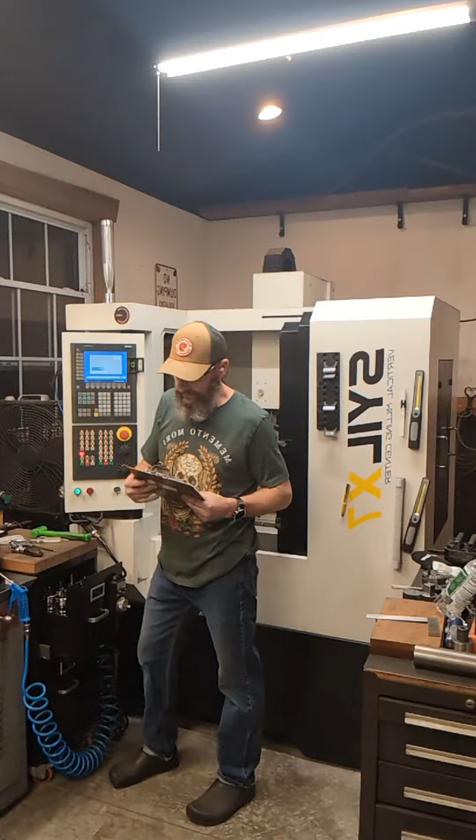Right now what I'm doing is running a warm-up cycle for 20 minutes. I got this program about 5 years ago from Peter Betts. I don't know his website, but he programmed this for Syil. I use the Siemens 808D controller and I love it. It works great.

I'm gonna move you around the shop as I go. How's that? So, these two at 61. Three at 61. I got one there.

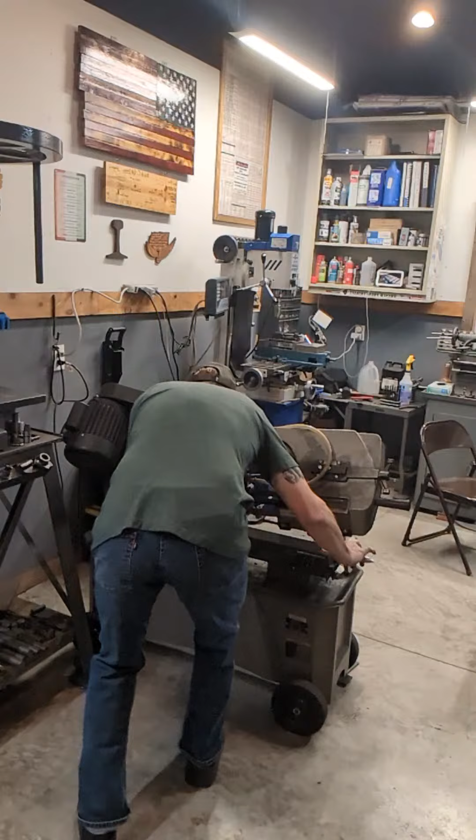Okay, this is my Jet horizontal bandsaw. It's been with me a long time, doing really well. What I'll do, so I've set this stop up at 61 so I don't have to remeasure the rest of them.

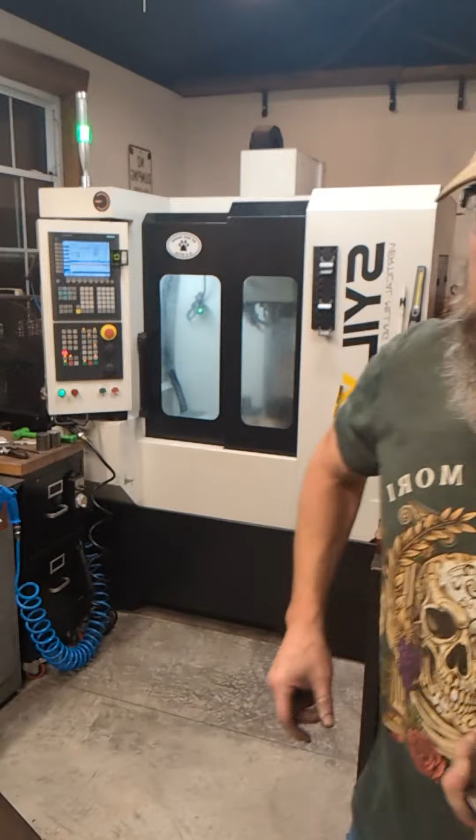So up until this point, I've made... this is what the bottom will look like, it'll be round like that. Okay, that's the 15 mil size, about a big tablespoon. This is an old bearing out of a locomotive, out of a train, and then I just have a little ball that goes into there. I think this was an old bolt that I rounded the top to go in there.

On a bigger setup for my bending die, I actually have a big, like 2.5 inch ball receiver for towing trucks, you know, for trailers.

So this is ready-made, people buy these things for the fly press. There's already a flange. Turn this down so it'll fit in your 1-inch bore. You can use this for forming, making bowls. Probably would work for a large coffee spoon setup.

But you know what, I've got the mill. I'm going to make it special, and then put it on my website for other guys who are similarly interested in precision-made tools for their fly presses.

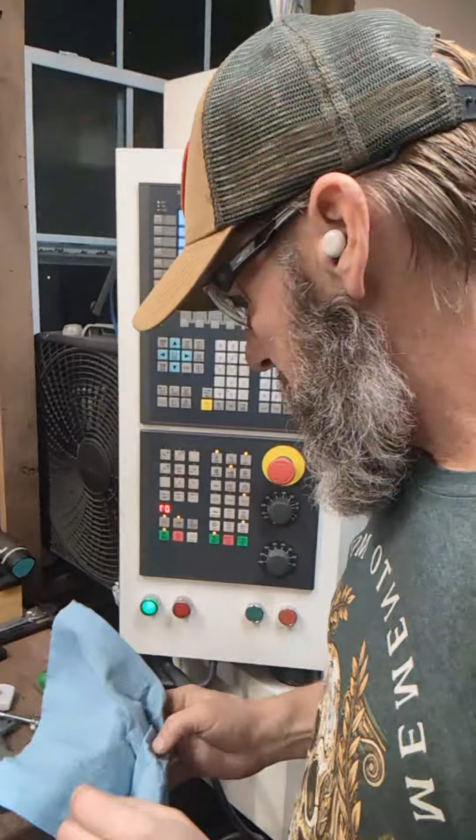You want to see what I see? This is my setup table. I've got my dead blow hammer, making sure my part is seated in the vise when needed.

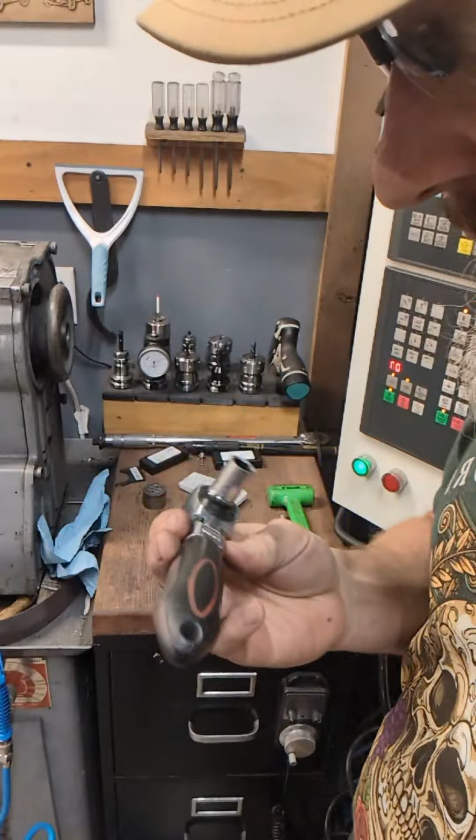I've got some hex wrenches for soft jaws and for tightening my movable jaw in my vise. I use this to tighten the vise. It's got a very short handle, which flips out like that, so it could be a speed handle if I wanted to. What I like about the short handle is it keeps me from over tightening the vise.

It's got an old coin die that says 0 fucks given. I make a lot of those. This one's worn out, and I just use it as a paperweight now. Got my 2 torque wrenches.

One for torquing my self-centering vise from Silver CNC, and one for torquing the Silver CNC 0-point base plate. So I have one set at each required torque value. I keep this handy in case I'm putting on or off soft jaws. It speeds up the process because this M-lock vise is quite long, it's got a big lead screw.

And then I've got a 12-station tool set up here. I just 3D printed these inserts, put them on some plywood that I had in the shop, in the wood shop next door. So these are the tools that I'll be using. The 1/4 inch, I've got a 1/4 inch end mill.

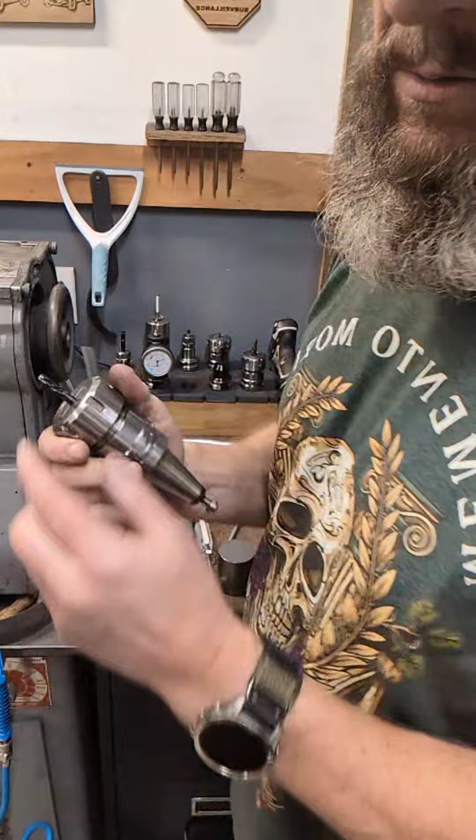That's in the mill, we'll use that too. I've got a couple ups. I need to be able to clear 22 millimeters on a couple of tool paths. So I want to make sure that my quarter inch, my 3/8 inch rougher, and my quarter inch ball mill have enough clearance, enough tool length. I normally suck these tools down as far as I can for rigidity and surface finish. Like this right now is 27 millimeters stick out, so that'll be fine. So yeah, I'll go through and make sure they all work.

22 millimeter clear, yeah. And then you can see here, when I drew this, I just wanted to know from this flange to the top of this ball, how much tool stick out do I need so I don't collide with anything.

I need to replace this roughing end mill. Looks like it's worn out. Yeah, it started to chip in certain places, so I'll put a new one in here. Let's do that.

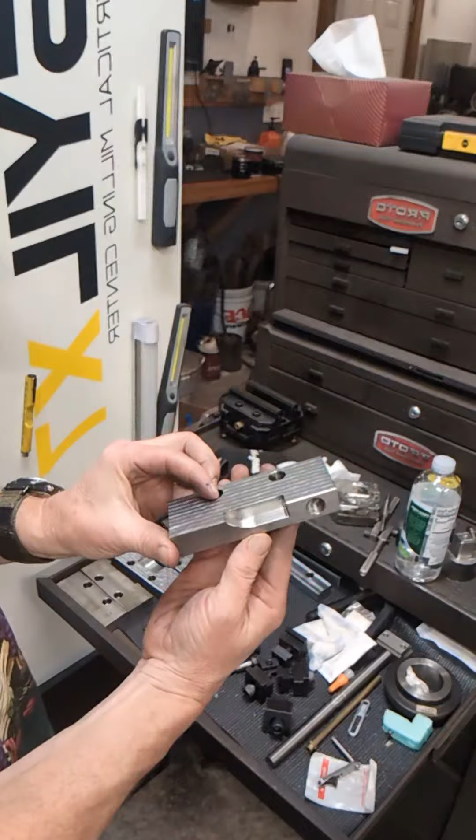This is my toolbox for my CNC stuff. Here are a few of my soft jaws, and when I say soft jaws, I make my soft jaws out of steel. These are permanent fixture jaws. For example, this jaw is when I make my specialty fly press tool holder. When I do one of my ops, when I flip it, I've already machined some of the features, so I need that tool holder to register these features, and then a spot to get my zero in my programming. But I'm running 2-inch 4140 today. I'll need 2-inch soft jaws.

Alright, one and two. So we'll put these on the M-lock, when the mill's done warming up.

That's it. This is by HTC Tool, the carbide turbo mill, 3/8 roughing end mill. There we go. And this thing is a beast, I love it. It has a different tone, sounds a little different than a helical end mill, but it cuts so well. Makes little chips that are kind of a pain to cut up or to clean up, but it works so much better than, you know, a traditional end mill. And then I save my nice end mills for the finishing passes, which works really well.

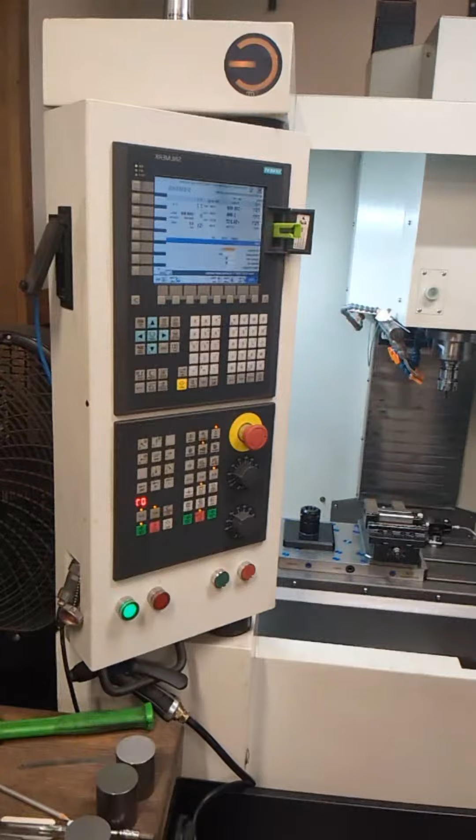I'm not sure where you guys want to be when I do this work. Maybe right here. I'm learning how as I go. Sorry about the jostling of the camera. You try that?

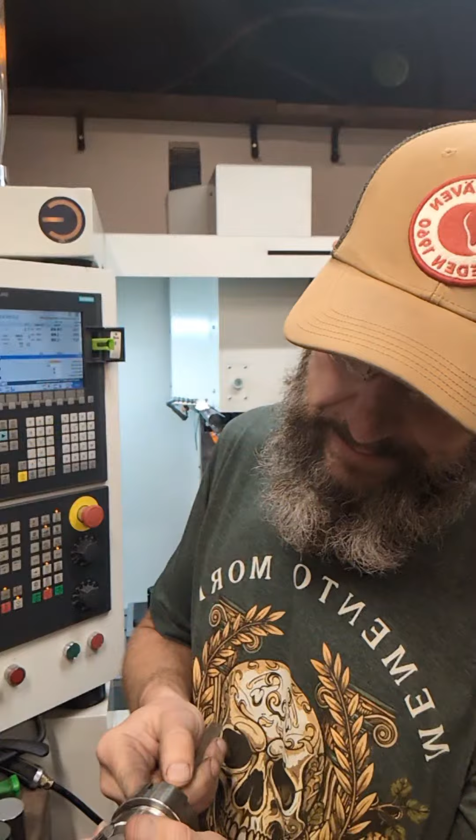This is my quarter inch end mill. And this needs to come out a little bit. That's too close to the 22 millimeters for my liking. So let me change this real quick.

Right. So the tools I'm using: got tool 3.1, that's the quarter inch end mill. Tool 4.4 is the 3/8 inch rougher. 5.1 is the half inch end mill. 6.3 is the quarter inch ball end mill. 7.1 is the 3/8 chamfer, 4 flute. And 8.2 is a 90-degree V-bit engraving end mill. So let's touch all those tools off.

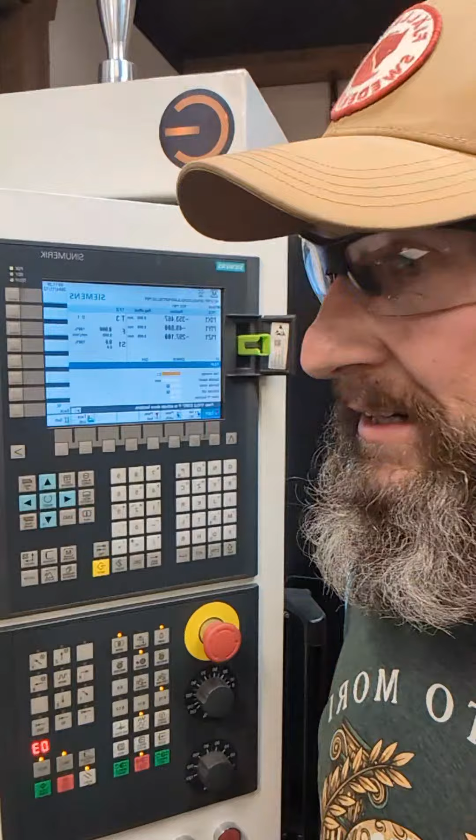So for my process anyway, this is all the stuff that I didn't know when I got into CNCing. I had zero knowledge. I was an army soldier, kind of with a dream when this all started in like 2019. And I didn't know any of this stuff. And I got this mill, it was a leap of faith. I didn't know what the heck I was doing. I didn't know how to change a tool, anything. Yeah, so anyway, I've got my quarter inch end mill in there.

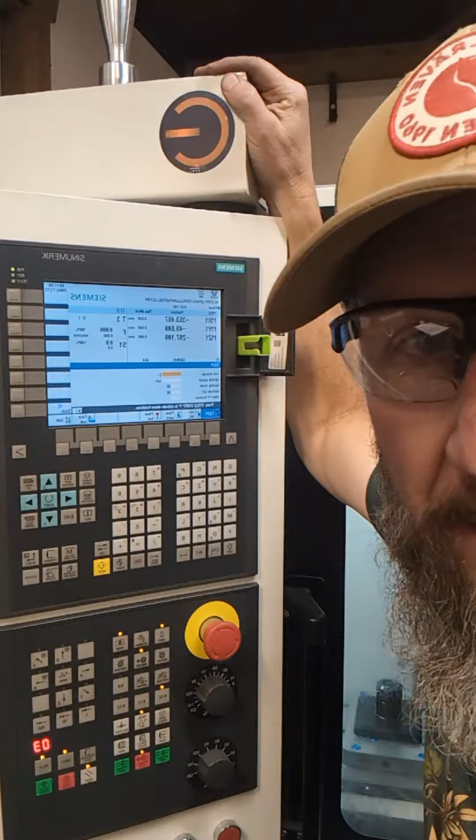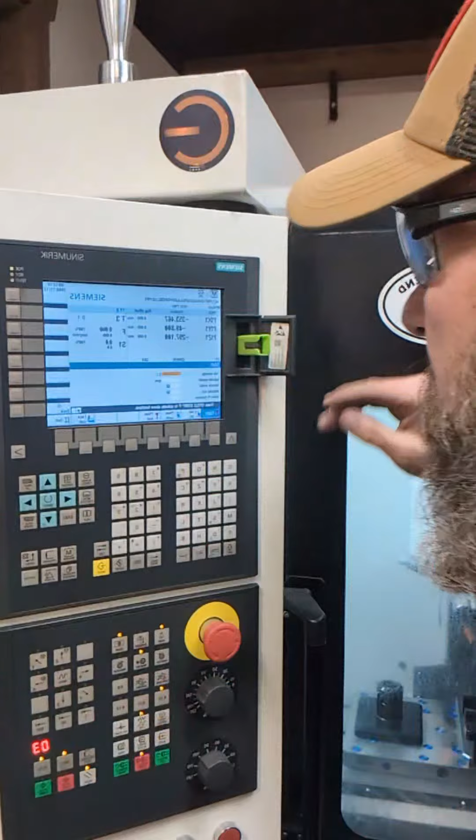Pretty much everything I'm running today is just in-computer. Basically Fusion 360 is telling the machine the diameter of the end mill. That's important when you're doing contour passes or high precision passes, when you want to get within a very fine tolerance. So what I like to do on this mill, just so I have repeatability, is do it the same way every time.

My first step is I want to get centered over this stylus. It's a 12.7 millimeter stylus.

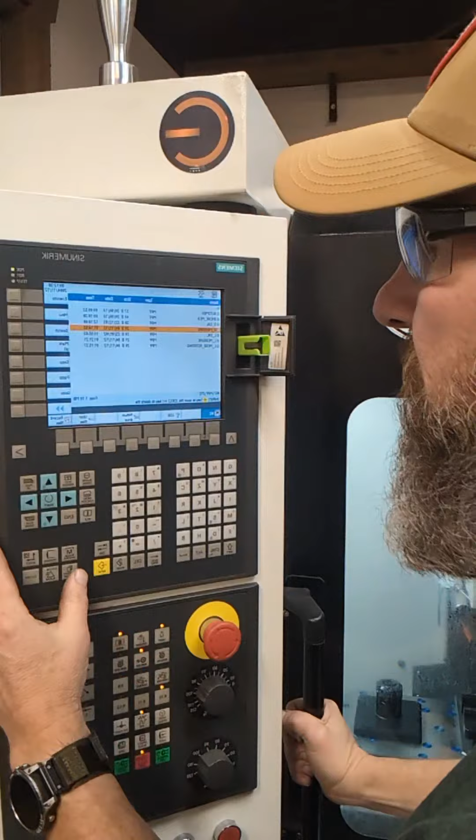When I got the Syil mill, I had all of these things preloaded - programs, the tool setter programs, 4th axis stuff, though I don't run a 4th axis. There were different tests too, including a spindle warm-up cycle by Peter Betts. That's all I have on here - everything else is on this thumb drive or a network drive.

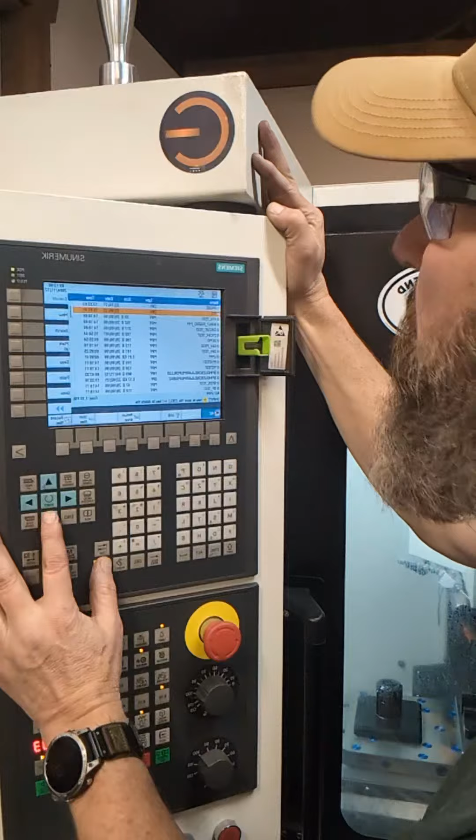I'm going to key down into tool change. The reason I'm going over this again - when I started, I had no idea, I couldn't find a video that showed me this. So I've got all of these - some are calibration, and some are actual measuring.

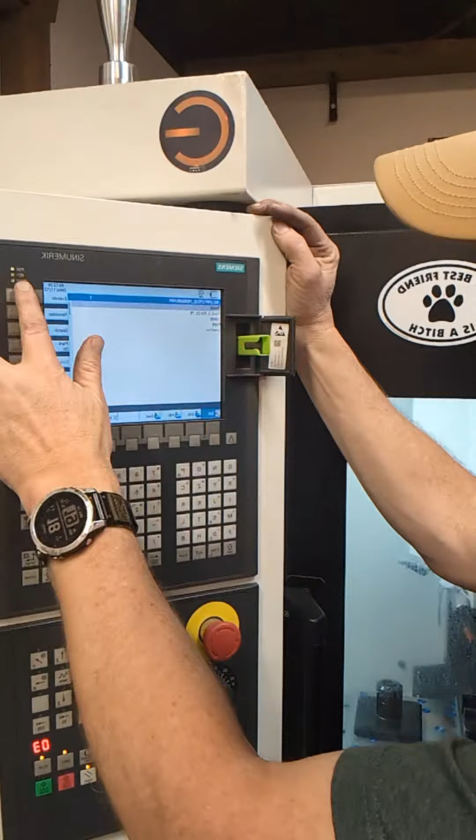I'm going to go down to my diameter measure. I've got 3.2 or 3.1 - that's the tool I'm using with the 12.7 millimeter stylus. I hit execute, I hit cycle start, and this does a tool calibration. What it does is hover it right over the stylus - it knows from when I've calibrated it where center is above that stylus, so it goes to that center point.

Even though I don't need the diameter in this control, and in fact I'll probably clear that back to 0, it sets me up to be centered on the stylus in the same spot for every tool every time I do a tool cut job. I know that's a lot.

Can you see in here? All right. That's just the way my mind is - I'm kind of analytical.

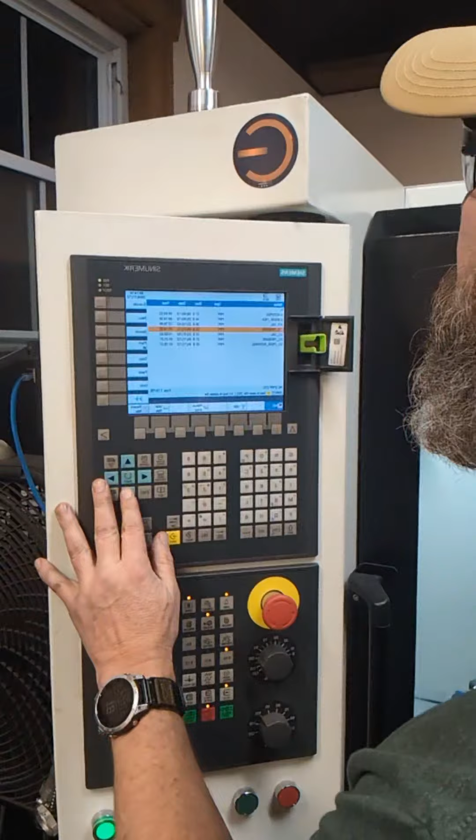All right, so I got the diameter in. Let's do the length - little 3.1s, and it's 6 millimeters. On this program, you put in the 6 millimeters or 6.35 - the diameter of the tool you're measuring. The bigger the diameter, the slower it's going to rotate when it's doing its test, and the smaller the diameter, the faster. I mean, within reason - we're not talking huge changes in our case. Okay, so 3.1, 6 millimeter. Go.

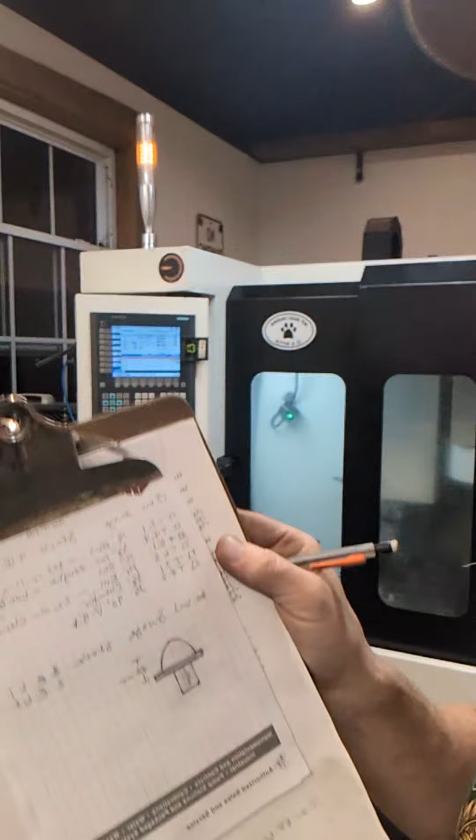So now I've got the 1/4 inch end mill done. Now I'm going to go through all of these - let me check that off, I've done the tool calibration, diameter, and length. Now I'm going to go through the rest. So enjoy the view of my backside. Next is tool 4.

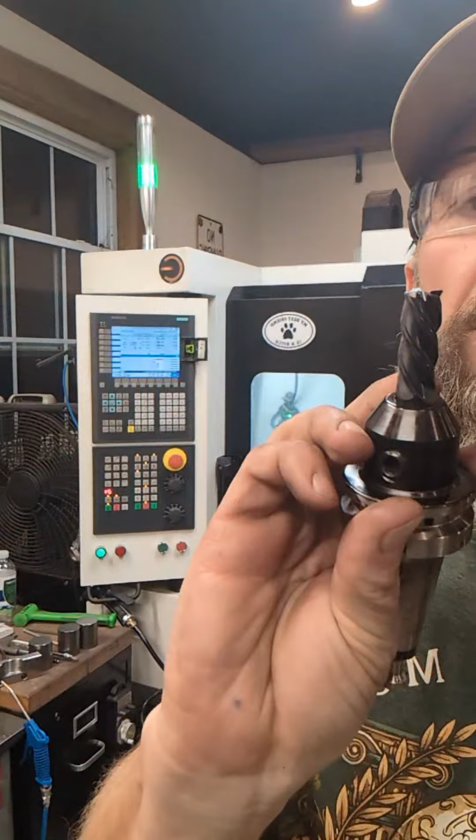Tool 5. Alright, here's my 1/2 inch helical end mill - a little end mill tool holder, looks great.

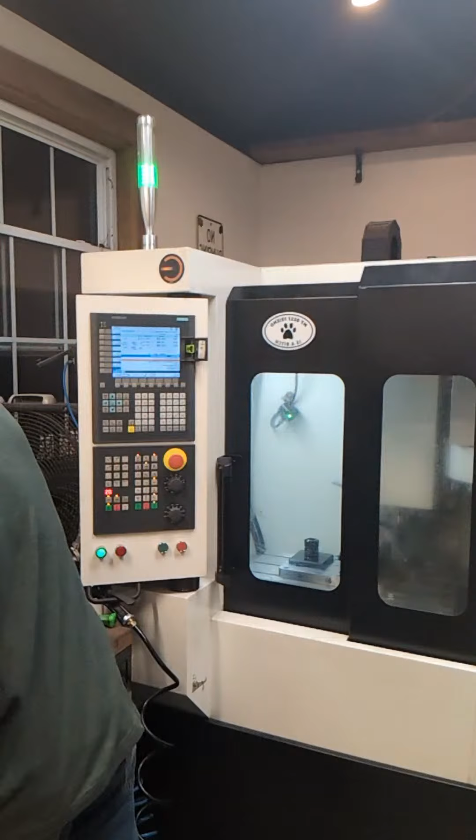And then tool 6, this is the ball mill, 4-flute ball mill. To do the 3D feature, I'm using a toolpath called Scallop. I actually haven't used Scallop before. Lots of parallel, lots of contour, but Scallop should be interesting.

So for the ball end mill, these other ones - I don't know if you could hear the motor, but for the 4-flute flat end mills, I tested the length as the tool was spinning. For ball end mills, engraving bits, drill bits, things like that, I just go straight down without it spinning. That makes sense.

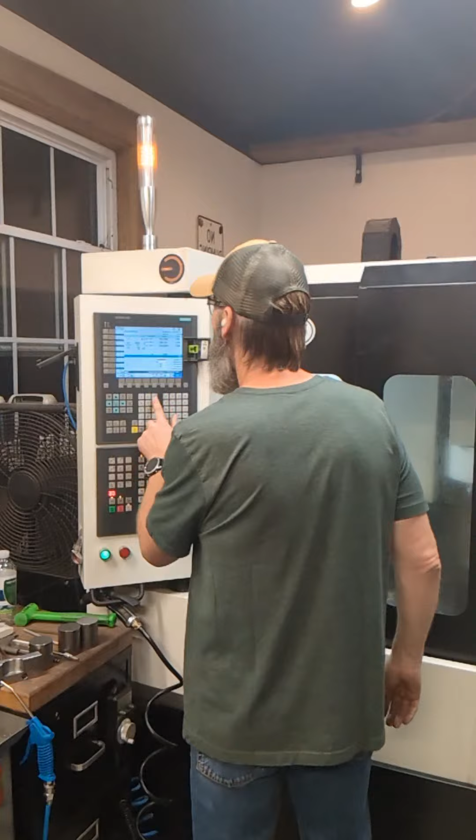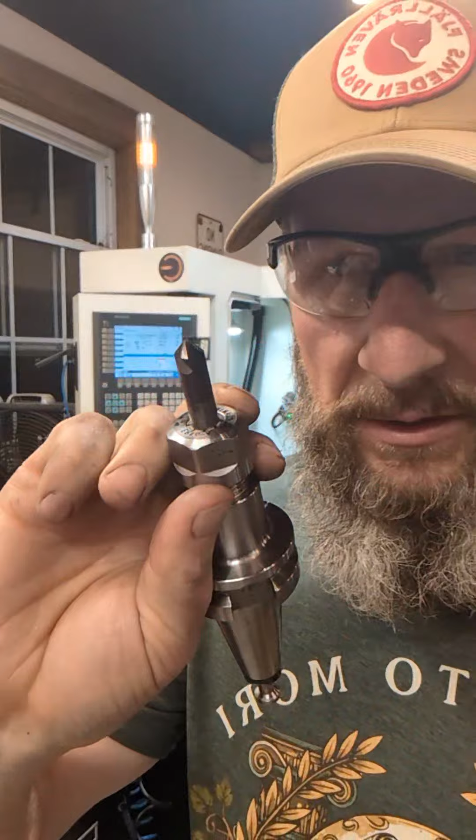So this is my 3/8 4-flute chamfer. It's actually double-sided, so if you wear out one tip, flip it, put it in there. I buy it from Maritool, and I love it. I've got it really sticking out a lot farther than I normally would, but I've got this clearance, right? I just want to be able to clear features of the part and not collide with them, and still deburr in the mill.

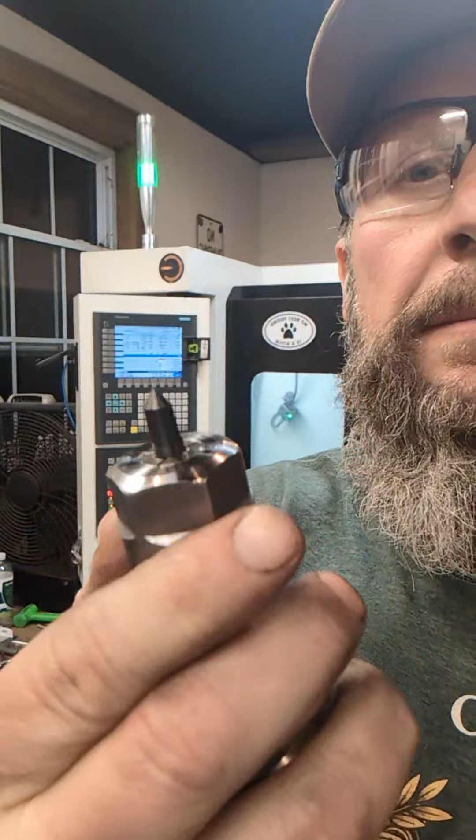My final part is a 90-degree V-bit, single flute. I buy these from McMaster Carr, they last a long time. I buy them in 90 and in 60-degree angles.

The 60 degree is going to be sharper with an angle, for a lot of engraving. Like, probably I average, I don't know, 2-3 hours a day, 5 days a week engraving right now.

And I already touched that off earlier today because I was engraving, so I don't need to do that. I'm going to change the tool to 12 - I keep my probe in tool 12.

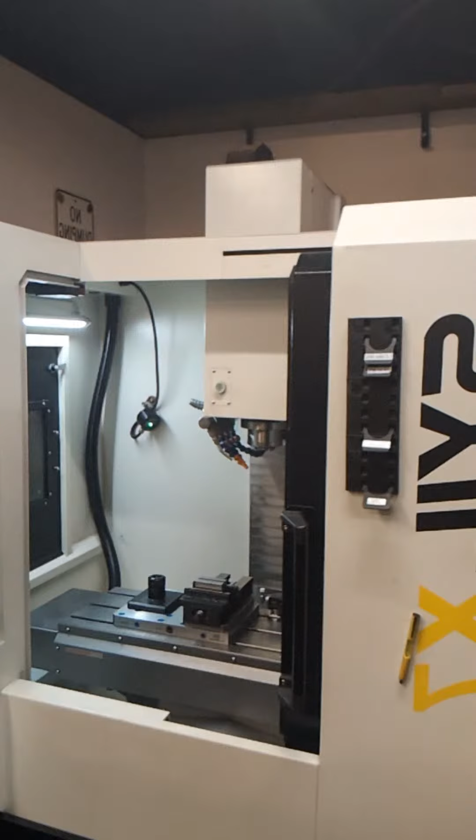So I'll be touching off this stock with my Haimer. So now we're going to do the soft jaws - let's take this vise apart and put the soft jaws on. That's why I've got this bad boy.

Before I take the back jaw completely off, I want to loosen the soft jaw - it's easier when it's still attached.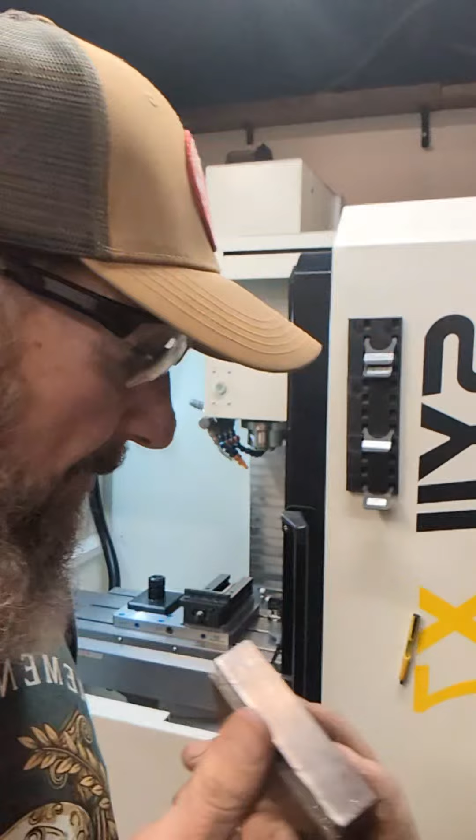If you're wondering what kind of soft jaw this is, it's aluminum, and it's very narrow - only about 75 millimeters or 3 inches wide. I use it to engrave railroad spikes. Railroad spikes have a big bulbous head on one end, and this is the way to go. The spike is very parallel but tapers out a bit toward the head, and since it's mild steel, this allows the soft jaw to deform and mold into the perfect shape to hold a railroad spike. I've been using these for years, and it's definitely the way to go.

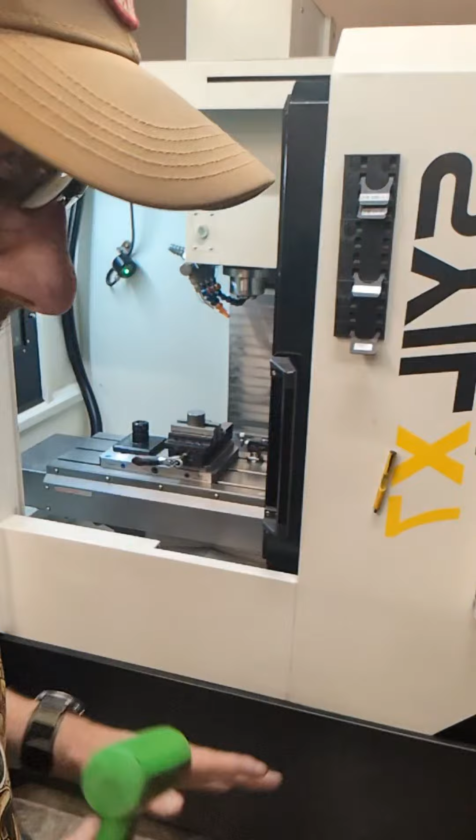Funny story about this hammer - I use this side for steel and this side for aluminum, because I find that dirt and whatnot can be imparted into your part with a dirty hammer. So I try to keep this one clean, just in case I have to set an aluminum part. Flip it.

If you've watched some of my videos, you may have picked up that on this spindle, I've got two dogs that stick out. On the one on the left, I put a little prick punch in there, and I always turn it and always face my probes. I always put my probe into the spindle the same way every time to try and get as much accuracy as I can.

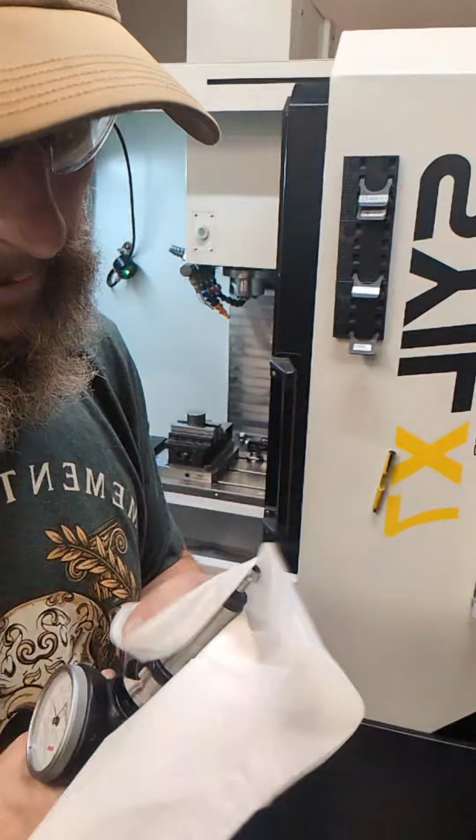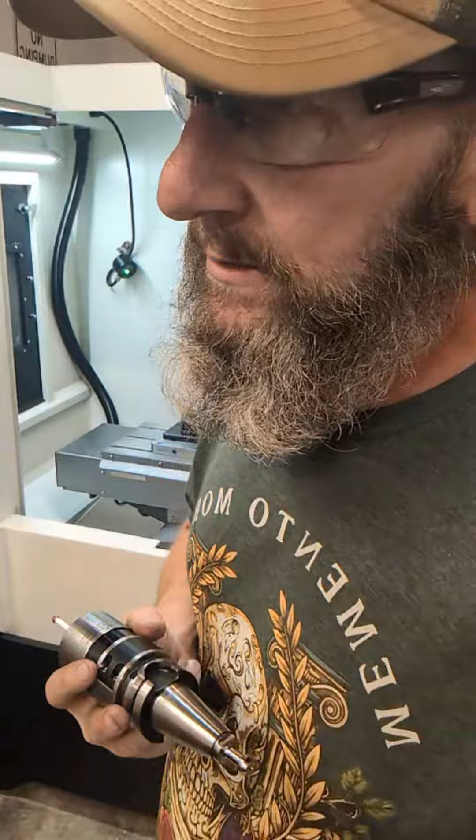I do have an automatic probe, and I used to use this all the time. I don't know, it just stopped working. It works in fits and starts - if I put new batteries in it, it'll work a day or two, and then it'll stop working. I even sent it back to China - Syil had it sent back to China to have it repaired at one point, and it worked. It worked for about a day, at least it worked then, but then it just stopped working. I think the batteries I use are 3.5 volt batteries, and as soon as they get to like - they start at like 3.6 when you read them with the multimeter - as soon as they drop to 3.4 or just a little bit, then the probe doesn't want to work. So, kind of a pain.

We'll just use the Haimer.

Alright. Everything on the big vise is G54. Everything on the little ER32 collet vise is G56. G54, G56.

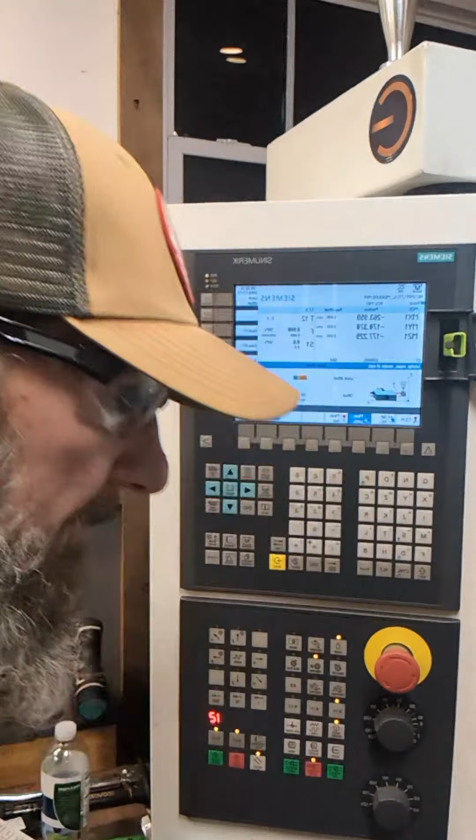And then on the screen, here's P4, and then I set my work offset. So I set my left X, right X, my front Y, and my back Y. I hit set work offset, and now I have a point exactly in the center of the part. Let's recover my probe.

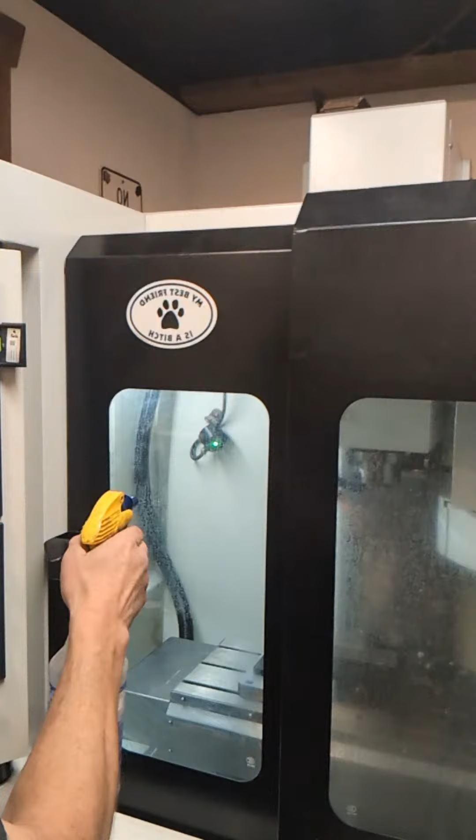Actually, let's wash this window so you guys can see a little better. It's dirty. When this coolant stuff dries, it's a mess. Is that even helping? Oh boy, it's not helping. Let me grab a paper towel and do it one more time.

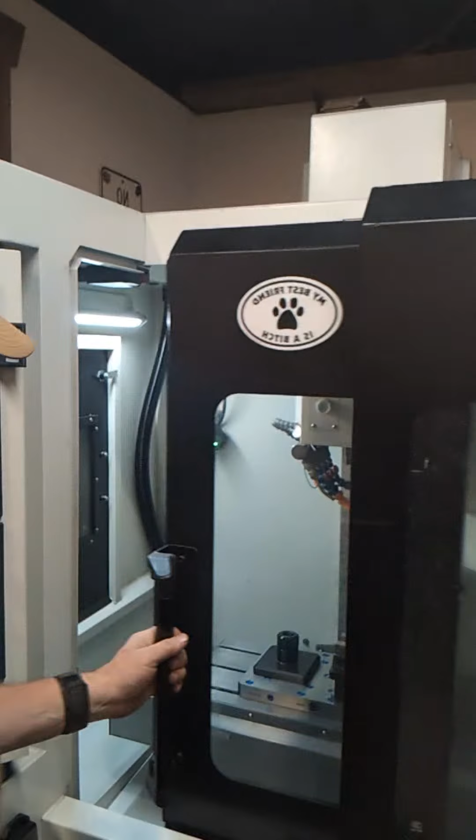It's a little bit better. All right, we're going to make some chips. And then I got some other stuff that I want to do. Okay, so let's get on this USB drive. Fly press tool.

Coffee spoon swage, 15 mil, and aqua. And since this is an untested program, I'm going to hit this feed override, go down to 0, and lock it in just for the first touch, just to make sure I didn't screw anything up, because I screw stuff up and then there's a big bang.

Okay, just double check my tools. 3144, 63 and 75. All right, I'm ready.

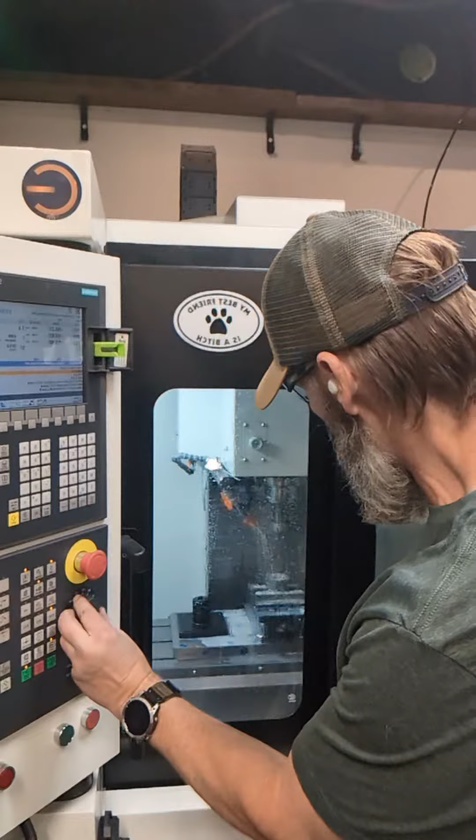Turn this down, and I think you can see. Okay, I'm going to hit start again, and then just go up one. See how this goes. Lock it in.

So I don't know if you can see, but it's hovering right over the part. So it's at the angle to where it's going to start, milling out the center of this swage.

So I'm going to hit stop. We go up to 100, full speed. Hit start again, and this is a loud end mill, but it works well. So let's see how this goes.

Okay, walk with me here. Maybe we can get a better look. Oops, on the side. Not really, sorry guys.

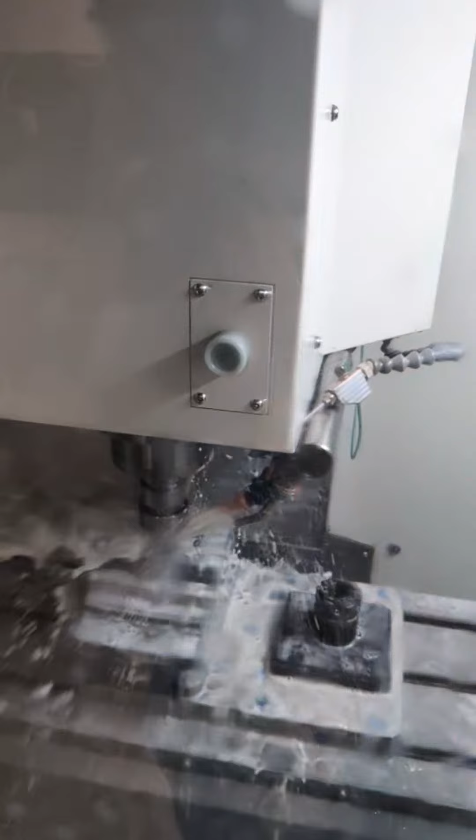So we're milling out the center, and I'm taking an extra minute or two with this tool path to get my steps down to 0.5 millimeter. You know, generally they wouldn't be so thin. You could probably go 10% of the diameter of the tool, but I want to prep it all, one and done for

the ball end that's going to go in here and scallop and smooth it all out. So I want to take out more material. I've got a flat operation going right now. It's taking off about a quarter millimeter off the top there. The quarter inch end mill will come in and clean it up again when this is done.

Alright, tool change, now we go to a quarter inch. Okay, everyone cross their fingers and hope that I got my tool length offset right and I just don't crash or break an end mill.

Yeah, this is the quarter inch. So in Fusion 360 you have an option to duplicate a tool path. So in this case I duplicated the last tool path with a different tool using rest machining, and it's going to clean up everything that bigger tool couldn't get. So it shouldn't take too long for this to run.

Well, I hope this doesn't bother you guys audio-wise, it's already really loud, but I'm going to turn my air conditioner on. I have a rotary phase converter, and that thing heats my shop up.

Oh. That's my last flat operation, just cleaning up the top surface. See here.

Whoops. Sorry, you're staring at the ceiling.

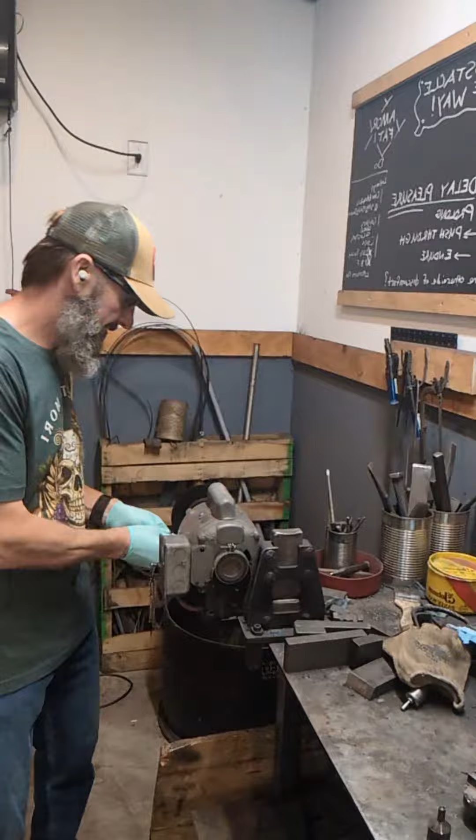So I love to spray these parts with WD-40 and then wire wheel them. I love using WD-40 almost like a soap - it's a nice little soap lubricant, and it does a great job cleaning the parts up, and as far as I'm concerned, it's a ready to go finish.

I'm getting better at this, but I've started to brand my parts. So that one says Power Forge, and 1/8-inch copper rivet. Yeah, so that's all there is to it.

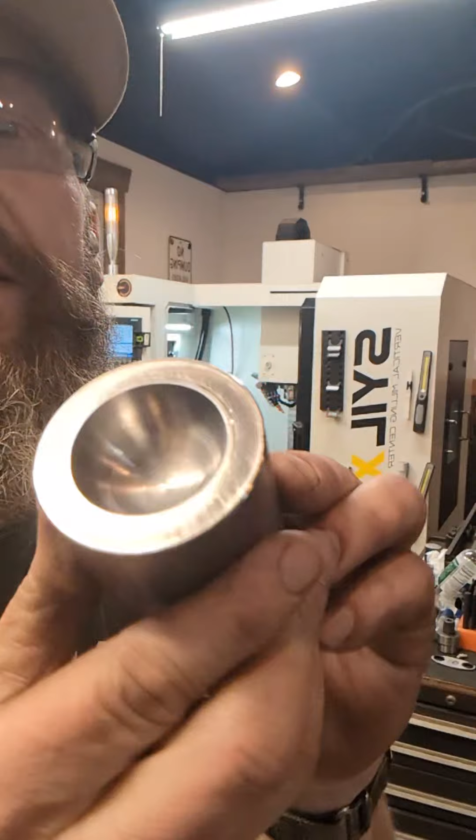That is a really great finish. You can even see there's a little spiral down there. Really heavy duty. So now we're going to machine this in.

I've been asked in the past, do I always tighten that back jaw down all the way? And the answer is yes, I tighten it all the way down. I don't over torque it, just wrist tight, but I don't want any lift on that jaw. If that jaw lifts up a little bit, especially on op 2, that's not precision machining anymore.

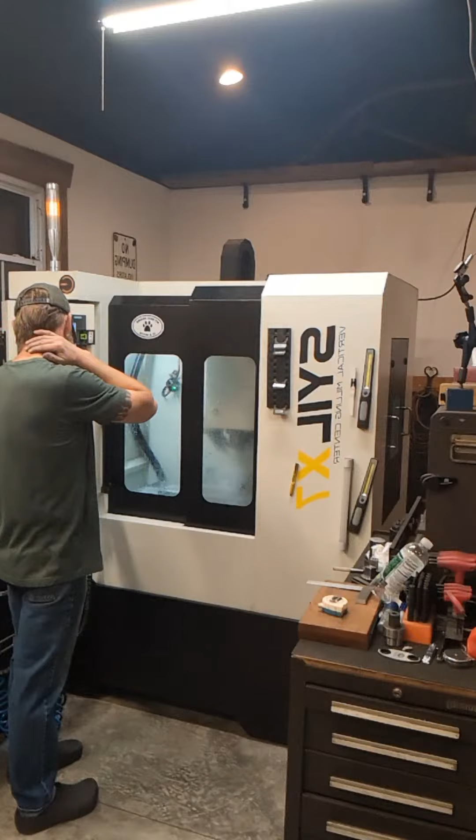I am so glad that I got that on live. I somehow crashed—I might have to go get my... I didn't crash. I'm gonna have to go get my laptop to see what happened. Let's get closer. What the heck did I just do?

I thought it was ready. Huh, okay, so there's one part scratched. I don't know what happened, let's see here. That's one tough end mill. Yeah, so it went straight down and carved a nice big chunk out of that, which is cool.

I've got material to waste there, so I'm gonna have to program—I'm gonna go grab my laptop. All right, I'm gonna have to pull up that toolpath. First, let's go up. Okay, no big deal. That's a tough half-inch end though.

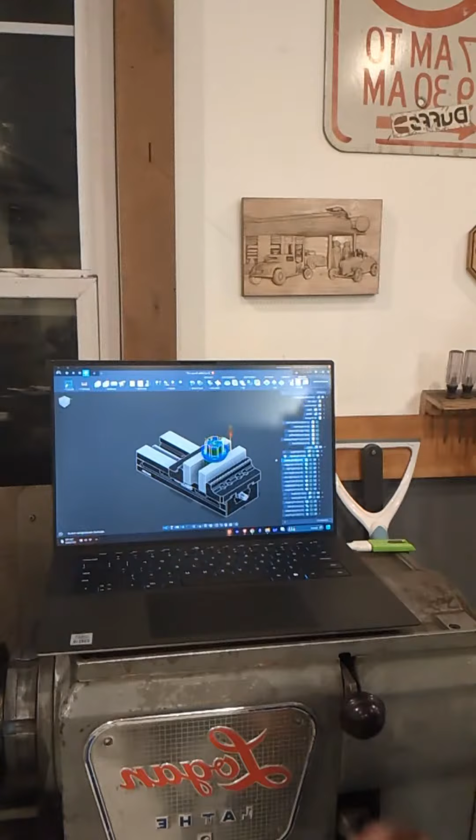Okay, so yeah, that's a problem. Oh, you can't see because of the lights, hold on. How's that, better? So we're on setup 2, make sure I have the right part. Op 2, why do they make this window so small? Op 2 BH. Oh.

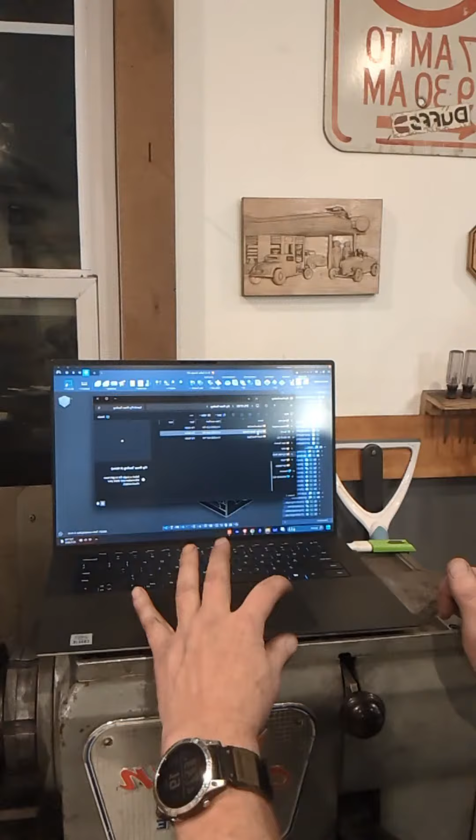Oh guys, I'm an idiot. Op 2 BH is the part, and I think I ran... tooling. Whoops, I don't like this mouse pad on the Dell. Oh, I think I... okay, alright, well whatever, you know it's hard to... okay, no excuses. I ran up to bottom hardy wear, which is the final toolpath, or the wear on the hardy itself.

I want to make sure it's 1 inch, because I want to make sure that fits in my hardy plate. It needs to be within a couple thou at least. So it was going for the final contour pass. That is one tough end mill, because yeah, we hadn't milled any of that out. So I think if I just run the right toolpath up to BH—I need to work on my naming convention—we'll be fine. Let's try this again. Oh my goodness.

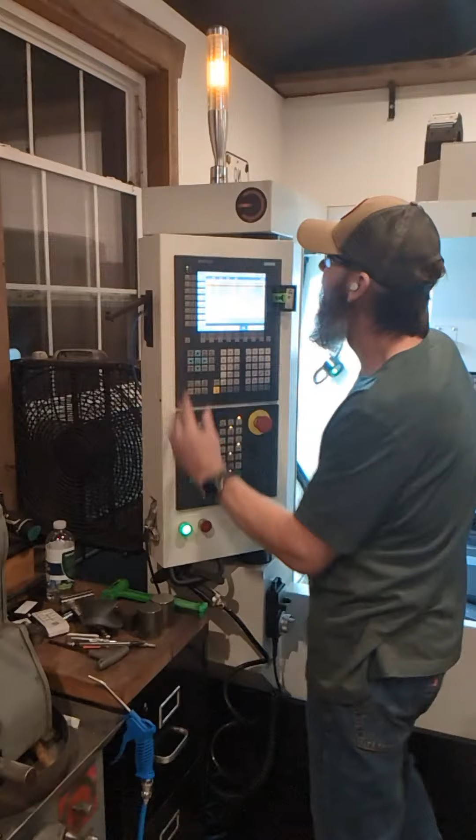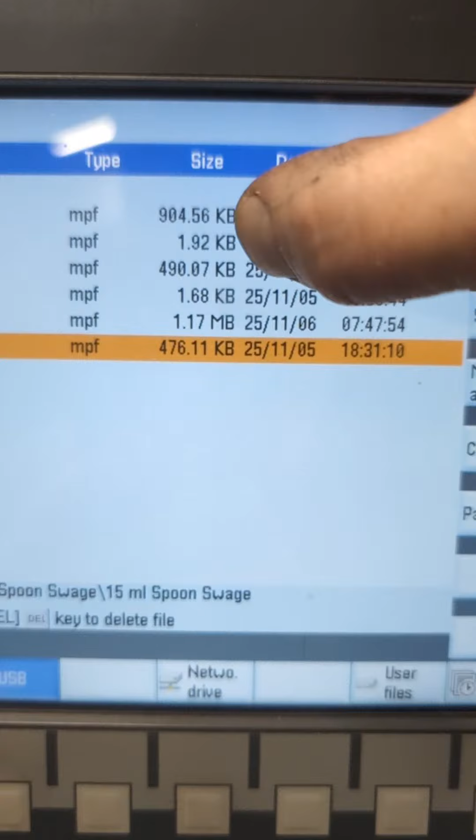So now I'm going to make sure that I'm on op 2. Wow, why is that not capitalized? Op 2 BH, bottom hardy. And then you can see the difference in file size. The wear is only 2 kilobytes, and the actual op is 476. Not a lot of code, but pretty amazing, right?

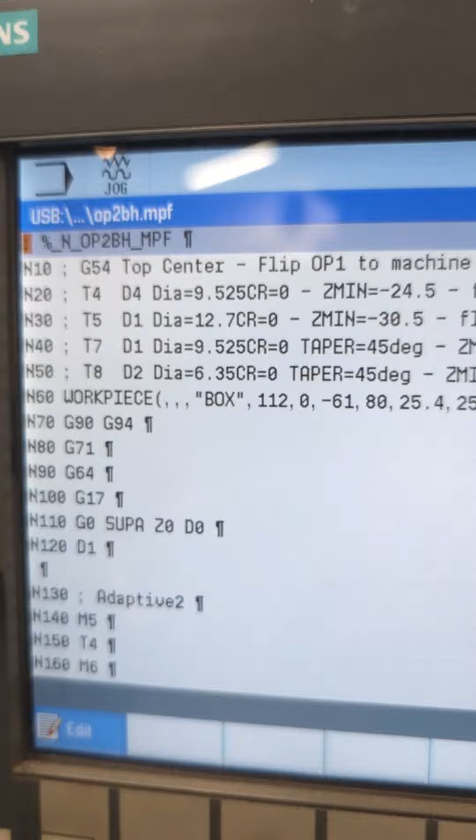Let's try this again. Same G54, but it should call up tool. It's just loading. It should call up tool 44 first. Yeah, 44, 51, 71, and then 82. Execute.

Alright, so you can see what I see. Cycle start, this needs to change to 4. And for shits and giggles, I'm still going to walk this in. So watch this, I'm going to stop it. Stop, turn off the coolant. Feed down to 0, my hand hits stop. Now I'll hit start again. And we'll feed 1, and watch.

See this? That's why I like the Siemens controller. I like this knob. I've used Syils in the past. I'm not a big fan of the way they do it with buttons, soft buttons.

So we'll bring this down. I don't know if you can see or not. Coolant on. And it should go to the side of it. And then stop. Yeah, so it stopped its Z movement.

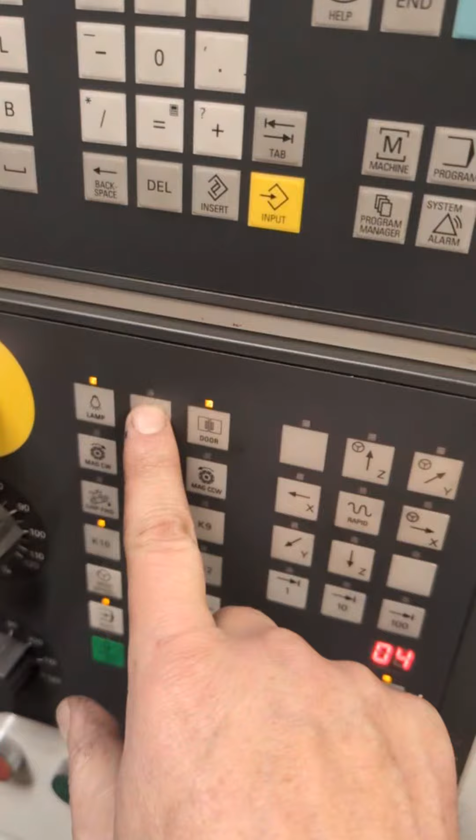So now I've tested that we're good. Gosh, think on your feet, Garen. Coolant back on. And then let her rip, with my finger on the stop button.

And that sounds better, what it's going to sound like in that void. Skip. Oh no, it's going down below it. That's why.

This is that turbo mill. It is a game changer for me because my BT30 spindle, especially when I've got these fixture jaws in here, the parts up high, the tools down low, it can be—you can get chatter, you can get extra vibration in the part of the tool, and it just doesn't cut well, but this cuts well.

Now I'm flattening out the sides because this is a square hardy. So compared to my helical flat end mills, I think this is about 60 to 70% faster. I mean, I use it anytime I need to hog material, and I'm doing it conservatively. My tool path, whatever, feeds and speeds calculator tells me to take, to go harder, but I don't. Keep it easy.

So I used the 3/8 end mill to hog out as much as I could. I might actually go back onto Maritool's website and look for a half-inch end mill rougher, so I can get a little extra, because I need the reach. That's why I go to these half-inch tools, is I need longer reach.

Let's check this out. Can you see? Kind of hard to make out.

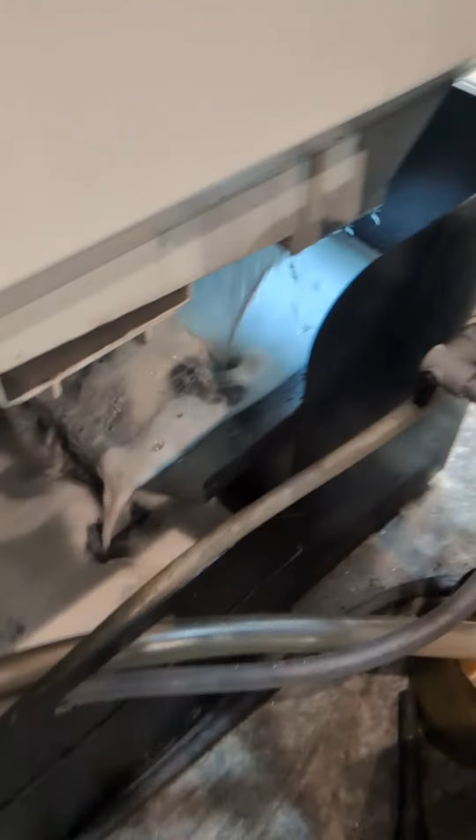You're wondering where all that coolant's going. All the coolant and chips go to this tray, this catch, and it comes into this big reservoir. I've got a vacuum back here, and since I engrave so much, I've got some magnets set up to pick up the fine dust, and I'll vacuum them off. I don't really want the magnet or the dust to get into the reservoir if I can help it.

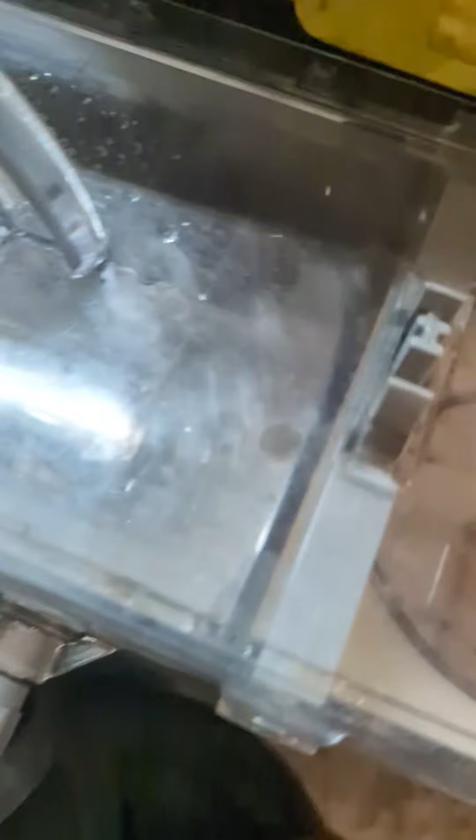And then this is my tramp oil contraption, which works quite well. You've seen it, it's caught some from last night's run. So what I do now is I'll pop this off, sometimes I'll use these, but I find it just as effective to pop this off. I've got a box of these towels that pick up oil, and I'll just dip them on here and grab some of that oil. I like it, it's a good setup. Keeps my oil fresh. I run it every night.

Gosh, that sounds, you can hear stuff vibrating. It's because I've got such a far reach. And I'm being really nice with the tool path, by the way. I'm not working this tool hard. This tool on a different mill can do a lot more than mine, but I just don't have the torque or the rigidity to do it, especially in this setup.

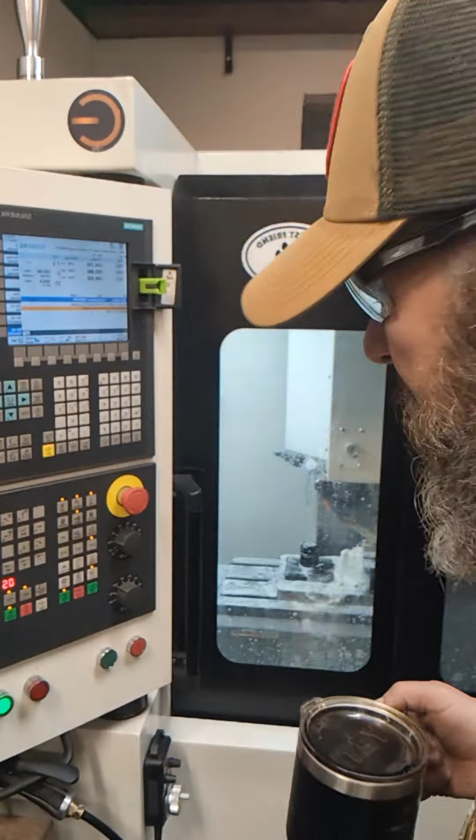Pro at doing these live videos and working scenes and stuff. Who else do I like?

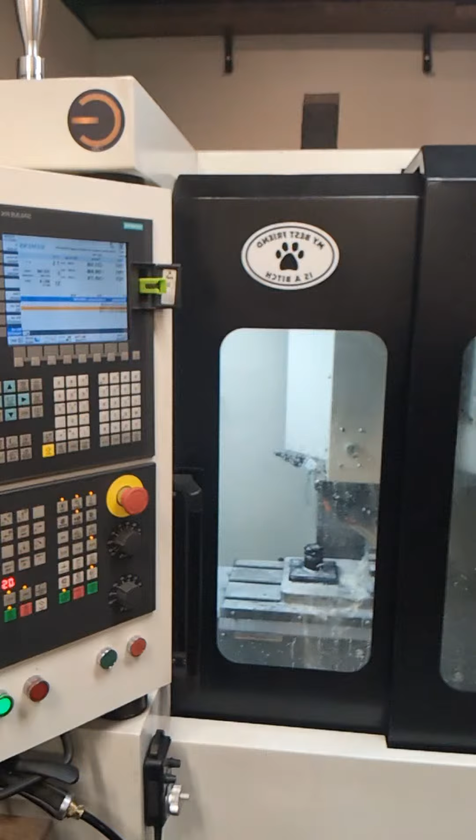I like Aaron Engineering, that's his manual channel, but he's the one that I first discovered the Syil with. I think it's DCT, right? Design Creativity, the Design Creativity. What is it, I have a sticker. The Design Creativity, a technology channel. Aaron's awesome, he films out of Australia, which is such a cool accent.

So what I'm looking at right now, oh that's machining, sorry about that. I'm looking at my stickers. I don't have very many, but got a few. I love coffee. I've got an Even Heat treatment oven, that's on there. I love Cool, the clothing brand. Haas, they're okay. Yeah, good stuff.

Alright, so this half-inch end mill is about done. I think it's cleaning up the floor. Then it'll probably do a flat path, a contour to a path, and then we'll do some chamfering and some engraving.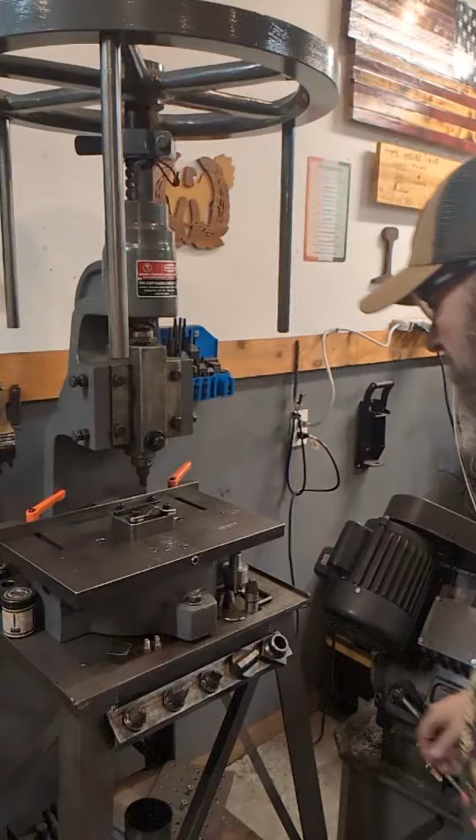So this is my Hardy tool holder. I'm going to use this to test that Hardy that I'm milling and machining, make sure that it fits my setup.

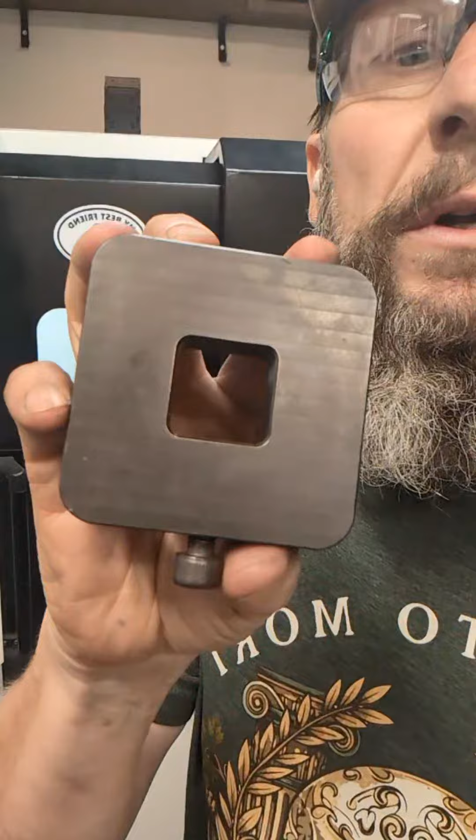Okay, easy peasy lemon squeezy, that's all there is to it. This is 4140 with a 1-inch Hardy in there, and radius corners. And then these zero-point retention knobs fit in my zero-point faceplate for the playplate, which I love.

Let's see what we got going here. Okay, so we're taking off, we're doing a flat operation on the top. And I've got it set at 10% step over, which is 1.27 millimeters. I could definitely go a lot deeper than that. This is kind of an experiment, just to see what the surface finish looks like prior to engraving.

Okay, so let's take a look. I'm going to adjust this, bring you in a little bit closer. So I apologize for the manhandling. How's that? Is that good? Okay.

Oh, I got a message. Daniel says, how many hours on your X7? Mine self-destructed at like 1300. Well, Daniel, I don't know, I've been using it since 2021.

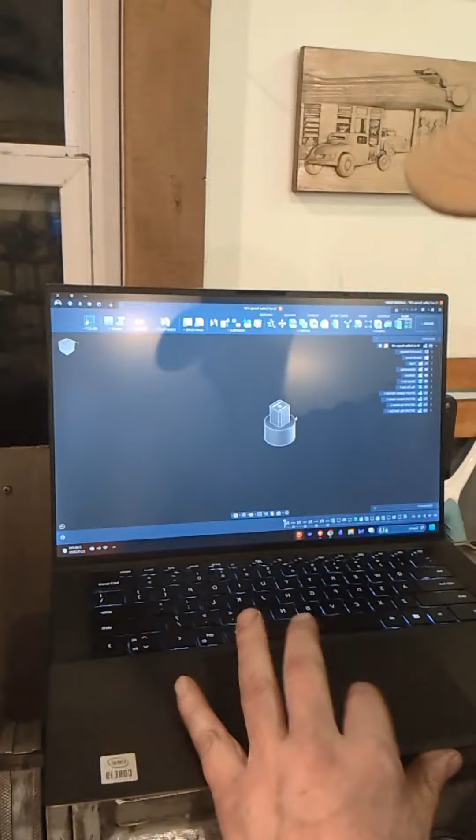But if we can Google how to look at the hours on a Siemens, I'll pull it up here after we finish this part and see how many hours I have on this. Probably not as many as you. I mean, I'm retired guys, I do this for my own sanity and mental health. That's why I do this.

Okay, so this is the part we're machining right now, and I've got every part set up. I created my own set of, I'll just show you. I'm sure you guys do the same thing. But I put the part in the vise when I do my CAM, and that way when I'm doing the 3D operations, the 3D toolpath, it's aware of the fixturing and avoids them.

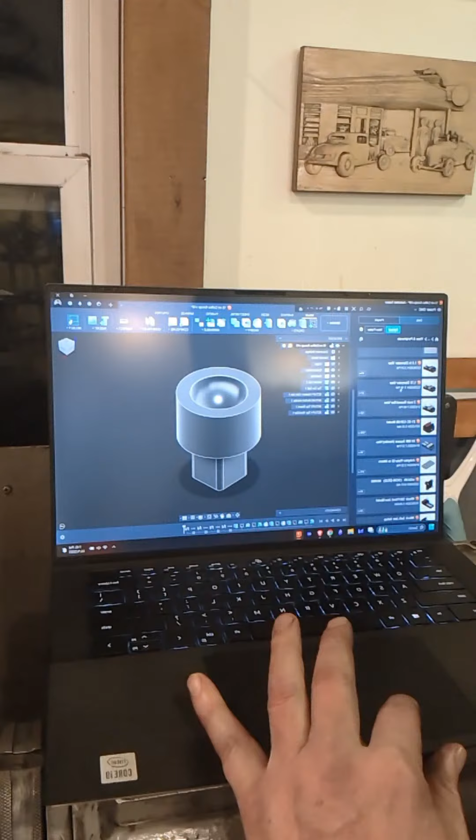So right now this is what I've got so far. I've got my main vise with different soft jaws set up automatically, and then I've got the silver CNC base plate and then the ER32 collet.

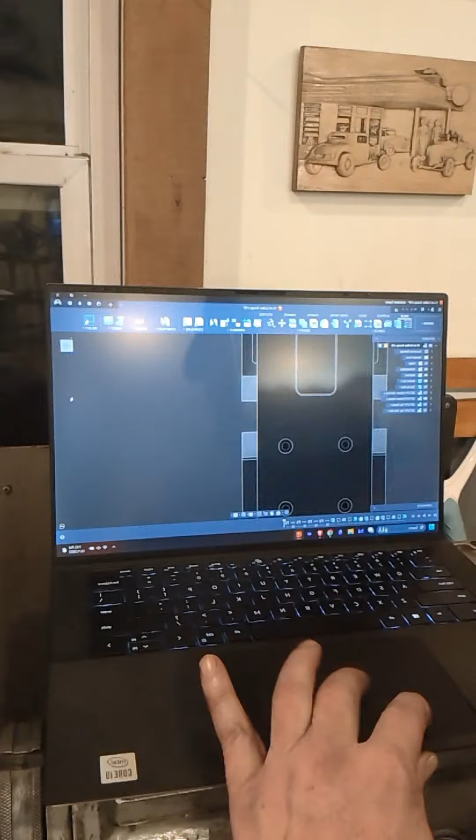So here was the part for Op 1, you saw that already. Here's the part for Op 2, what we're doing right now, which just finished. So let's take a look at that.

Sorry guys, how do I do this? Orbit, I'm so used to having a mouse. This is what we did just now. Fancy.

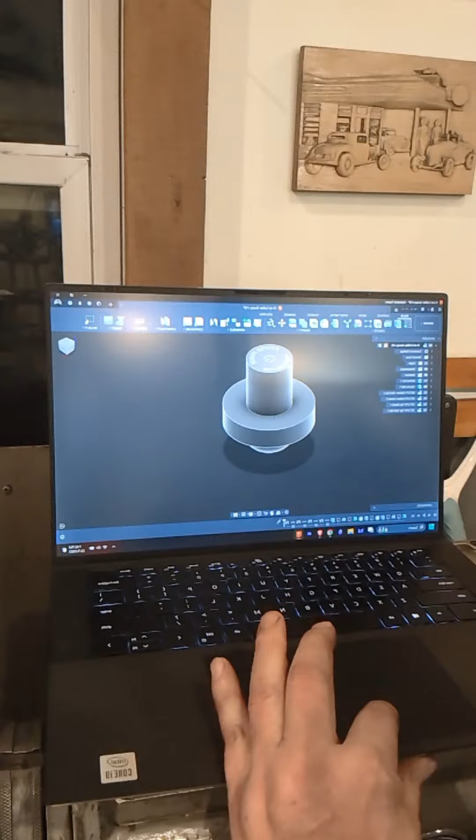And then when I get off live with you guys, I'm going to do this other part. So here's the top die, and then you'll see on the bottom, right, that will go right into the bottom form. Should look really cool.

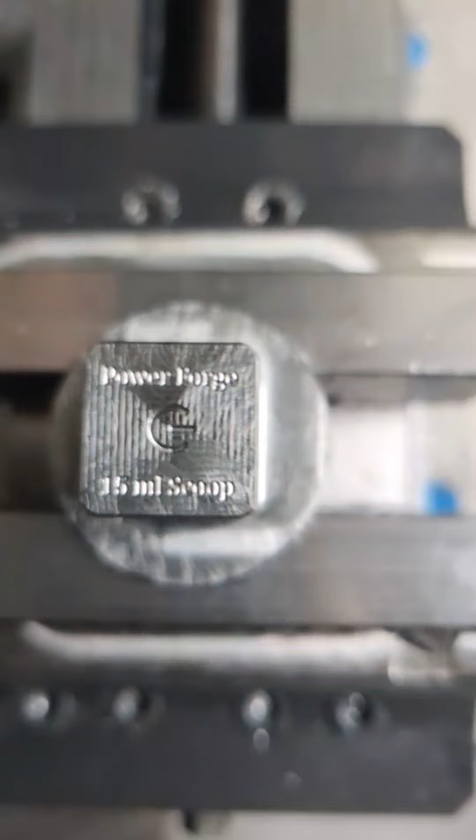Okay, let's take a look at this part. Yeah, so I don't think I'm a fan of that step over I did with the 3/8 or the 1/2 inch, and I'm going to increase that next time.

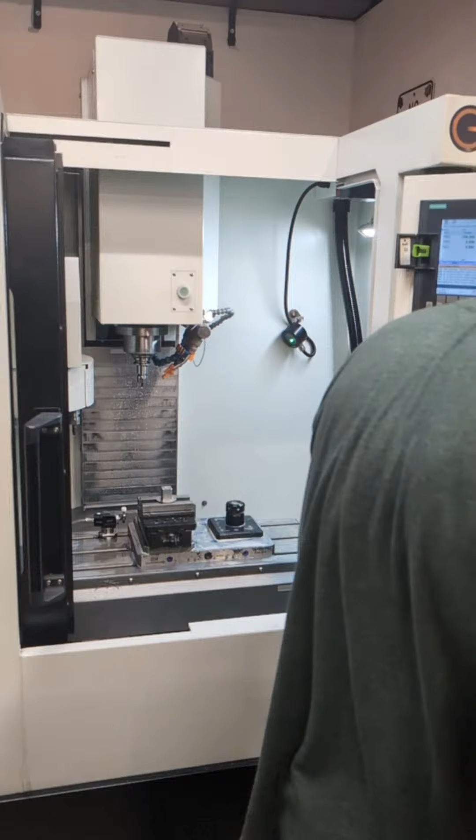Let's pull this out. Okay. Alright guys, there it is, one and done.

I get a lot less done when I'm on YouTube Live. I should have gotten all 4 of these done tonight, but I'll get them done tomorrow.

So Op 1 was this 15 milliliter. Basically I modeled it, well, didn't even know, but the volume is 15 milliliters. I did the math beforehand, so I knew the diameter of the circle. Basically I drew it out in a sketch, and then I did a revolve to get that shape. And then the 1-inch hardy with my branding. So let me catch up, make sure.

Yeah, sorry to hear about your machine, Daniel. That sucks. I'll tell you what, when mine goes, I'll be saving a lot of money. It's like a charity project. I think I'd make more money not trying to run a business.